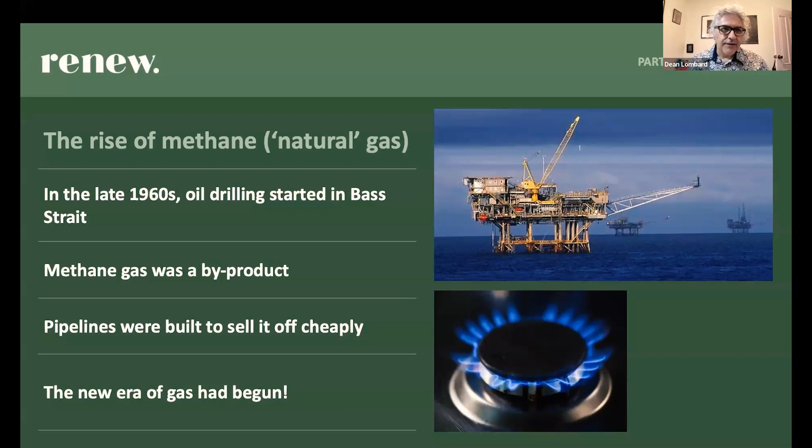So that's how we landed in the world a lot of us live in now, where we just expect to have gas on tap as well as electricity. Really from the 1970s until about 10, 15 years ago, gas was very cheap, because again, it was just this byproduct.

This led to what became pretty much the norm in urban areas in Victoria, which is dual fuel households, where you use gas for heating and cooking and increasingly hot water, and electricity for other things. In particular, whole house ducted heating really developed during the 70s and 80s to become pretty standard, heating the whole house.

It does burn a lot of gas, but again, gas was cheap. You were warm, you weren't paying that much. It was pretty cool - pardon the reverse pun.

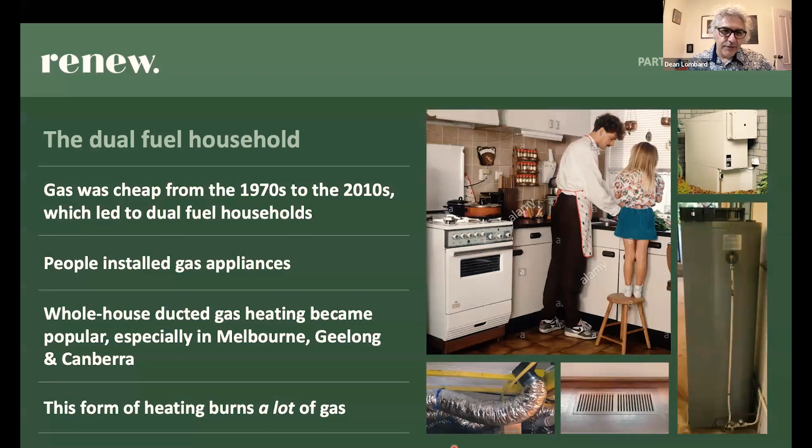There were lots of government programs to encourage people to switch to gas appliances. It was seen as the future. They were much cheaper to run than the equivalent electric appliances, and they worked better, because the electrical appliances didn't work that well - you remember the old-fashioned electric cooktops were pretty useless for cooking on, for example.

Things are changing now because those oil wells are drying up, and gas is now much more expensive because it's much harder to get those last bits out, and a lot more gas comes from coal seams or fracking. It's much more expensive and makes much more pollution. We also export a lot of gas now internationally, and that's put prices up. So gas is no longer cheap, and it's no longer clean.

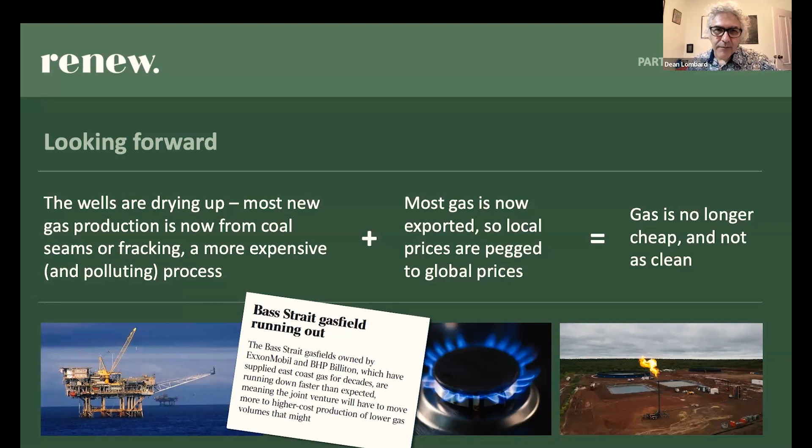One of the other changes is that the technology of electric appliances has also improved a lot, and modern electrical appliances for heating, cooking and hot water are much more efficient and work much better than the old ones that some of us remember from houses we used to live in. I've said a few times hot water, heating and cooking.

That's because they're the three things that most households use gas for. You don't normally use gas for other things, though there are gas lights and gas tumble dryers, but generally hot water, heating and cooking is what we're used to using gas for, and they can all also be done with electricity.

Is it more than two-thirds? 45, 55, 65 - yeah, more than two-thirds of energy the typical home uses just on heating and hot water. That's huge. So shifting that from gas to electricity makes a big difference.

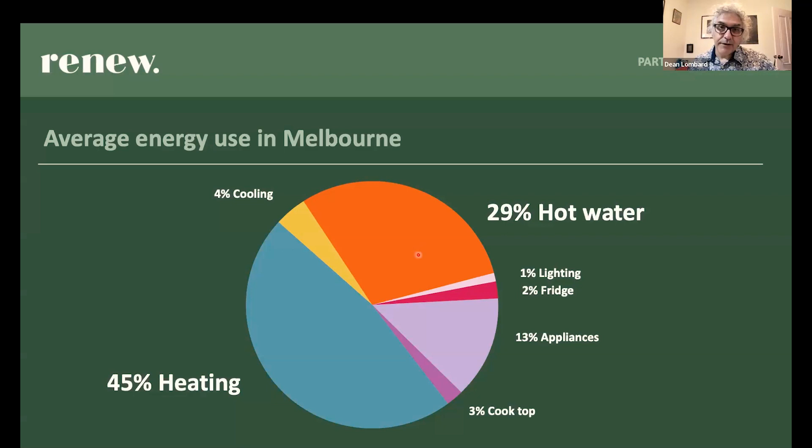Especially if it's cheaper - is it cheaper? Good question, because a lot of us who grew up in Melbourne have this belief that gas is cheaper and electricity is more expensive, and I'm going to try and pop a pin in that balloon right now. It did used to be the case that it was cheaper to heat water in your house with gas than electricity, and it's no longer the case.

We found that, yes, sometimes these efficient electric appliances cost a bit more upfront. It's actually not as much the case now as it was when we did that report in 2018, because prices have come down a lot. But they do lead to lower energy bills, so even if they're a bit more upfront to buy, you actually save over the life of the appliance through much lower energy costs.

It's worth remembering that one benefit of not having a gas connection and being all electric is that you don't pay that daily or monthly service fee for the gas bill. Your electricity and gas bill both have that daily fixed charge, often between 70 cents and a dollar a day, listed separately, and you pay it no matter how much you use. If you don't have a gas bill, you're saving about 300 dollars a year just by not having that fixed cost, not even counting your energy usage. So that's one thing that helps make a single fuel a lot cheaper for a household than having dual fuel.

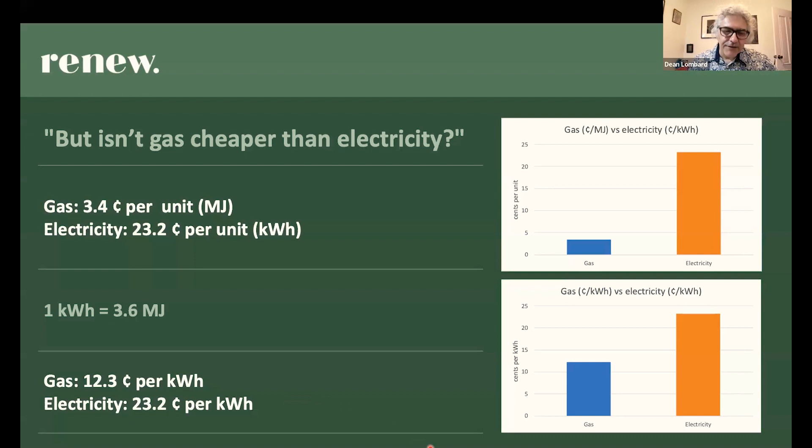So you need to actually convert them to the same units to compare the price. It's the same as measuring one thing in kilograms and another in pounds, the numbers will be different, but that doesn't mean they reflect the true difference, because the units are different. If we convert gas to kilowatt hours too, so we measure them both the same way, gas is still about half the cost of electricity per kilowatt hour. The same energy value of gas costs half as much as that same energy value of electricity, which again would quite reasonably make you think gas is still cheaper.

But here's the kicker: we don't get gas or electricity for their own sake, we get them for what they can do for us.

We get electricity so it can run a heater or run a light. We get gas so it can run a heater or cook our food. So we really need to look at how efficient the appliances are at using the energy, because what's important to us is not energy in, but energy out. We want the same amount of energy out.

That's when I mentioned before about the improved technology of these electric appliances. Modern electric appliances use heat pump technology - reverse cycle air conditioners for heating, and heat pump hot water systems for hot water. They are far more efficient than the gas systems.

Here's two examples. Gas ducted heating is between 50 and 80% efficient. That means for every 100 units of energy that goes in, you get between 50 and 80 out in hot air, and that depends on what condition the ducts are in, et cetera.

Whereas a reverse cycle air conditioner is 450% efficient. You actually get more heat energy out of it than electrical energy that goes into it. And that sounds like it goes against those laws of physics, and I'll explain in a few slides why it doesn't. But for now, just take at face value that the heat pumps actually produce more energy than the electricity that goes into them, because they also pull energy from the ambient air around us.

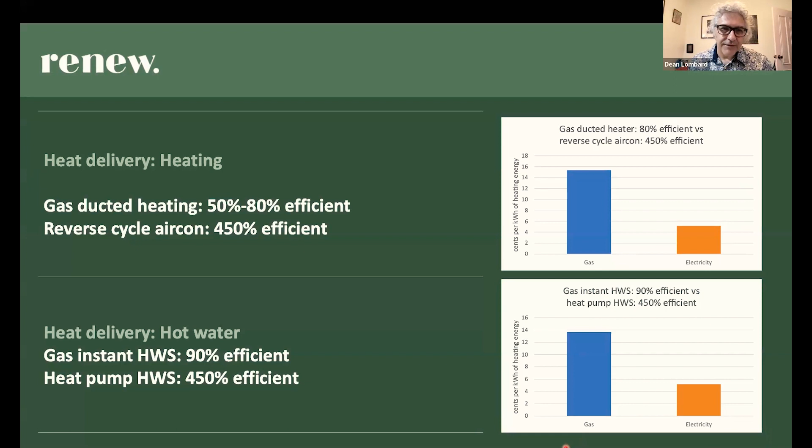This is cents per energy out of the appliance. You get far fewer cents for electricity than gas for the same amount of heating. It's pretty similar for heating as for hot water. This is basically how many cents per unit of energy out. The efficiency of the modern heat pump electric appliances basically means you use so much less electricity, so much less energy to run them, that it's cheaper, even though the electricity is a bit more expensive. I hope that's not too confusing, but...

I'll explain a bit more how the appliances work in a bit more detail in a second. I just want to move on to the emissions picture, because a lot of people are concerned about the emissions, especially because we know that a lot of electricity is made by burning coal or gas. And we were told that gas is quite low emission, and we know that coal is quite high emissions.

One thing is, the electricity grid in Victoria is not just coal. We have a fair bit of gas, which is low emission. What I mean by that is we actually use gas to generate electricity, not just use gas in our homes, but gas is used to make electricity. We have quite a bit of gas electricity generation. We also have a fair bit of solar and wind in Victoria - not just solar on people's rooftops, but also large-scale solar farms.

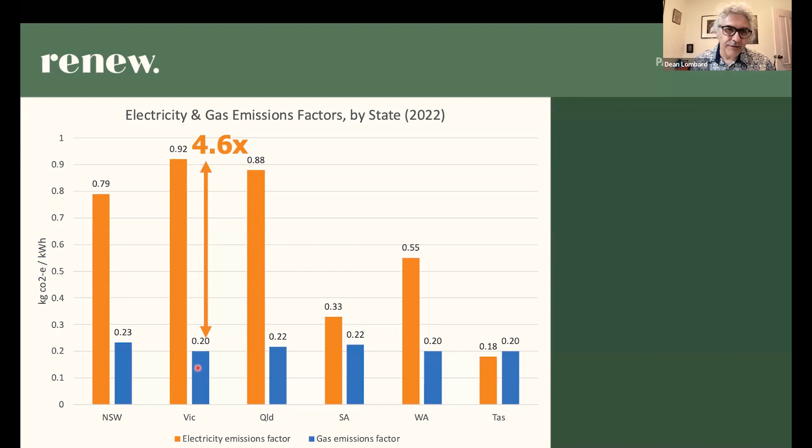...we're going to use a lot more emissions if we're using electricity instead of gas. But again, the same factor comes into it - the efficiency of the appliances. The reverse cycle air conditioner uses 5.6 times less energy than the gas heater it replaces. The heat pump hot water system uses 5 times less energy than the gas instant hot water system it replaces. And so that 5 times actually outweighs the 4.6 times, right? You use 5 times less electricity, so because you're using so much less, you actually are producing less emissions than if you're using the gas one.

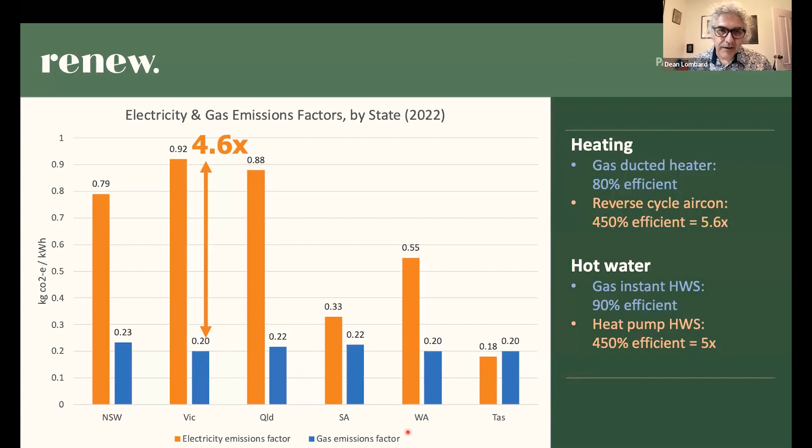This is sort of borne out by this study that we did about 4 years ago, again looking over most of Australia. We modeled the energy usage of whole house appliances - all the appliances that could be either gas or electric - and compared, looked at the emissions, looked at the energy usage of the appliances, looked at the emissions of whatever state they were in, and measured what the emissions are across a year for these houses if they have gas appliances or electric appliances.

We found that in most places in Australia, a house with gas appliances actually generates more emissions than a house with electric appliances. Here's Melbourne - it's a bit less, not heaps less, but definitely less.

Most places in Victoria, it's actually a bit more of a gap than Melbourne. The only places in Australia where the all-electric home has more emissions are places that are very hot and don't really use any heating. Mildura in Victoria, they're about even. Brisbane, it's more emissions to be all-electric because you don't really use your heater. But for most of us in Victoria, right now in 2023, electric home on average has less emissions than a gas home.

Even though our electricity grid has more emissions than our gas grid, that's because the all-electric homes use less energy.

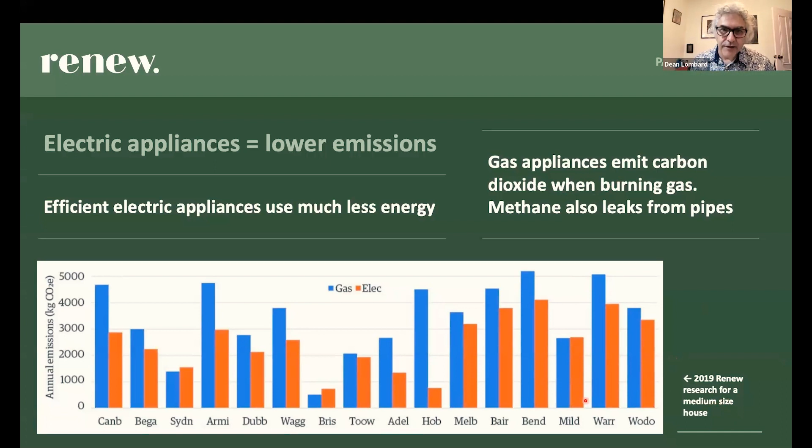But also, that's just now. This research was from 2019, so it's a few years ago, and things are changing. Gas is actually getting dirtier because as those oil wells dry up - and they're the easiest and least emissions-intensive way to get gas - we're getting more and more gas from what they call unconventional gas, extracted from coal seams or fracking. This creates heaps of wastewater, emits much more greenhouse gases, and is piped a lot longer distance. There's also gas leaks in pipes that create emissions.

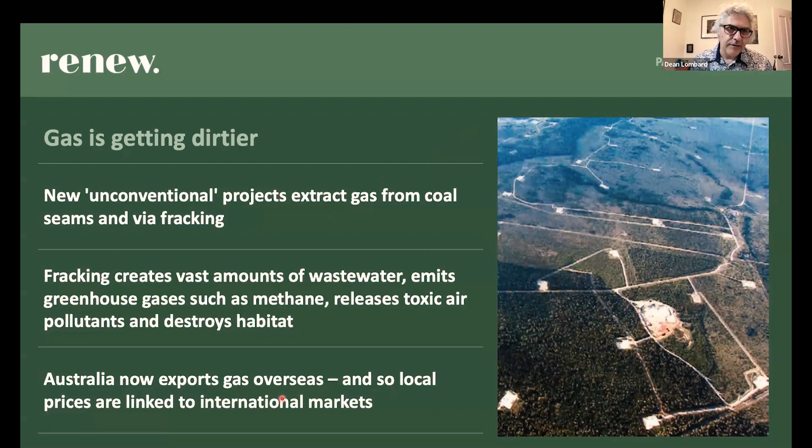Every year gas has a bit more emissions than the year before, and it's also getting more expensive because of its link to international markets. And electricity supply is actually getting cleaner - I mentioned already about solar and wind lowering the emissions of our electricity grid.

Every year there's more of these renewable generators and more solar panels on people's roofs, which are part of the energy system. Our energy supply in Victoria already is around 30% renewable on average over the year, and that's a lot more than it was even a few years ago. It's just going to keep getting more as more of these systems are built. By 2030, our grid is projected to emit about a third as much as it does now - that's a huge change.

So if we go back to this chart, this is 2022 - I did this with 2022 figures, the latest figures from the greenhouse accounts, for each of those states. In 2030, it looks like this, and this will blow your mind - that's how much the emissions of the electricity grid in each state are going down over the next seven years, because of the increasing growth of renewable energy.

So by the time you get to 2030, it doesn't even matter - even if the electric appliances were using the same amount of energy as the gas appliances, which we know they don't, they'd still be low emission because the emissions are going to drop so much. That's all part of this whole national target towards lower and lower emissions.

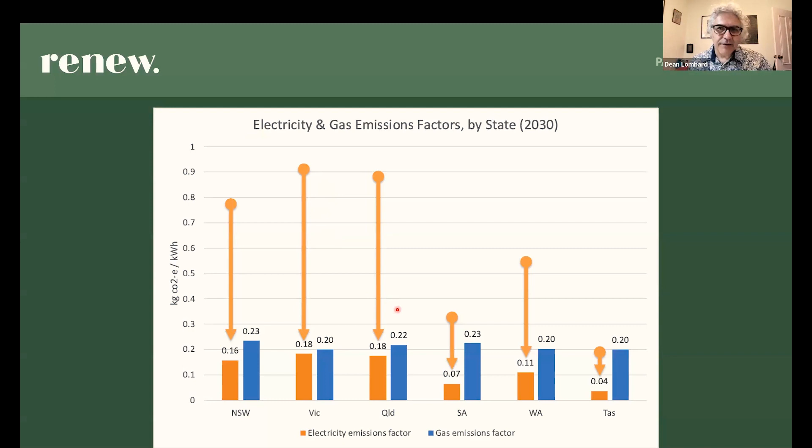That's the quick summary of the cost thing and the emissions thing. I'm now going to talk a bit about the appliances, and this is where I'll dig a bit deeper into that weird thing about reverse cycle heat pumps producing more energy than they take to run. But first, I'm going to do a quick overview of the evolution of appliances.

In the 1960s, these were the modern, cheap, clean appliances. Some of us will have had some of these in houses we grew up in, or share houses, or whatever - we might still have them in our houses now. These old, what they call resistive electric stoves with an element that gets hot - it's the same technology used inside the old electric hot water systems and inside these very groovy looking but not particularly effective heaters. It's called resistive.

I might use that term a bit, so I'll explain. The way a resistive electric element works, it's the same as a light bulb - you just jam a lot of electricity through a thin wire and it gets hot.

That's why, when your phone's charging, it gets hot - same sort of thing. These appliances are designed to make heat by forcing electricity through a lot of resistance. That's why they're called resistive. Very effective for making heat, but varying utility.

We all know with these old resistive stoves that they take 5 minutes to heat up and then they don't turn down immediately, so you got to take the pot off, and it's a bit of a pain. These heaters are great for making your legs feel warm, but they don't really get you when you step back a couple of meters. So these are the mod cons in the 60s. We now just remember them as being a bit useless, really.

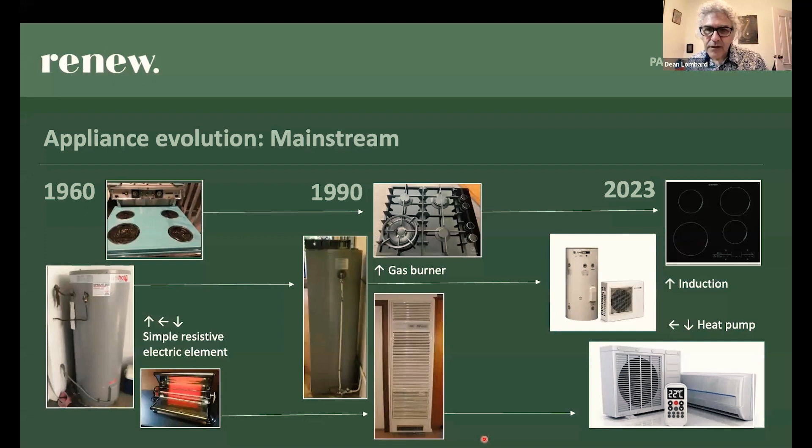So it's really this change of technology that makes the difference for all this stuff. How the heat pump works: basically, the electricity that runs it spins a fan and operates a compressor, which is inside that box. The fan sucks air in from outside the house, forces it through the compressor, and in the compressor it basically extracts the heat from the air. Cold air gets blown out of that box, but the heat that's sucked out of the air is sent to the air conditioning unit, and then there's a fan in the air conditioning unit that blows it out into your room, makes it warm.

And this is why you can put in 1 kilowatt hour of electricity into the heat pump, and get 5 kilowatt hours of heat out. A kilowatt hour is like an amount of energy. Typically it's 1 kilowatt to run the heat pump, and it puts out 5 kilowatts of heat. You do that for an hour, you've produced 5 kilowatt hours of heat.

The thing is that even when it's winter, that cold air still contains heat. That's a little bit hard to get your head around sometimes, but just think about it as: when it's 2 degrees outside, it's really cold, right? But when it's -2 outside, it's a lot colder, right? That means there's still heat in the air, because 2 has more heat in it than -2. Although we feel it as cold, there's actually heat in air down to basically -273. -273 degrees Celsius is when there's no heat in the air. And as soon as you're warmer than -273, then there's some heat in the air.

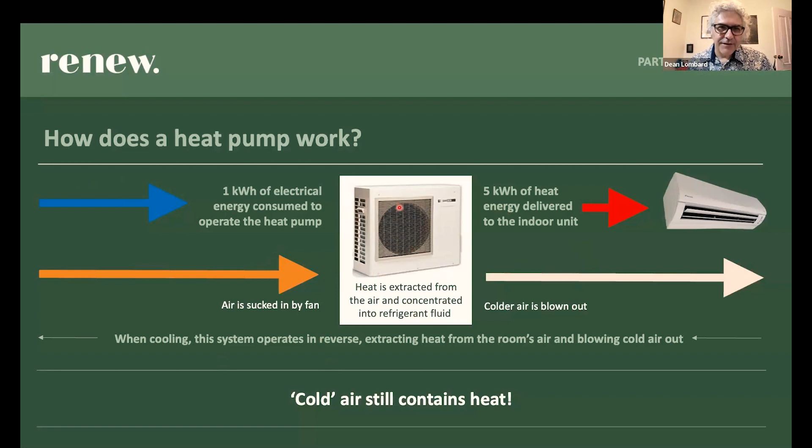Reverse cycle systems heat and cool. The way air conditioners and fridges work is exactly the reverse of this - they take the cold air in and uncompress it, which produces heat that they take out. I'm not a technologist, but it's basically a fridge in reverse, an air conditioner in reverse. That's why it's called reverse cycle.

So that's basically how it works. Now, thinking about the appliances, because people often ask, okay, if they're going all electric, what are the appliances, what are the differences? So I'll start with hot water.

The efficient hot water systems use a heat pump, just like a reverse cycle air conditioner. There are two types generally. Some have the compressor built into the tank, so it's a single unit. Others have a separate one mounted on the ground next to it, just like the box you see for an air conditioner. They're a storage unit, just like a gas storage unit - there's a particular volume of hot water, they heat it, the tank's insulated, it stays hot for quite a while, and you use it at mains pressure.

You use it when you have a shower, turn on the tap - it's really exactly the same as your gas storage hot water system. Just like gas ones, the modern ones are more efficient than the older ones, and they have good fast recovery if you use up all the water. As we learned from our gas hot water systems, you've got to get the right size for your household, otherwise you run out of water. That's the same for these. So if you're shopping for one, do make sure it's the right size for your household.

They normally scale them according to how many people a house has. It's usually a good idea to scale them according to how many bedrooms a house has, even if there's fewer people living there, because if you sell the house and people with more people move in, it's still going to be the right size for them, or if your family expands, etc. So that's generally the guide.

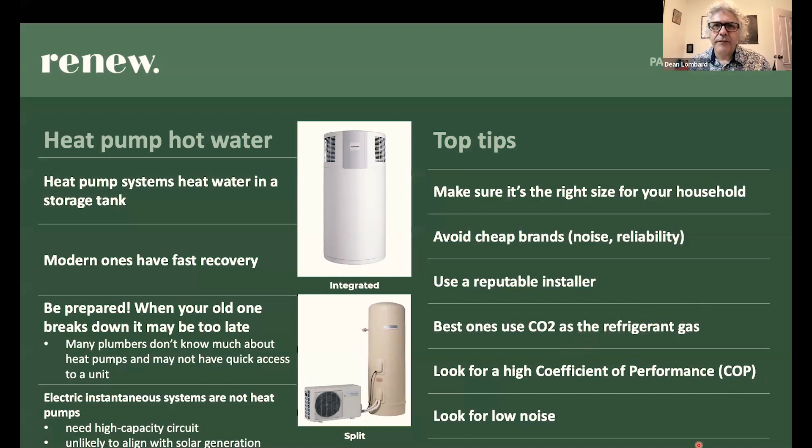I spent a bit of time on heat pumps because they're the sort of new one that most people haven't had much experience with. Reverse cycle air cons - a lot of us are familiar, a lot of us have them in our houses already.

Look, if you're replacing a ducted gas system with reverse cycle air cons, you normally need a few of the reverse cycle units spread through the house. If your house is not well insulated, you might find it hard to keep warm. Ducted gas actually works well to keep a poorly insulated house warm because you've got heat coming into every room, but it's very expensive because you lose a lot of heat through the ceiling. So it's a mixed blessing.

If you get your insulation good and stop as many drafts as you can, you'll find that with a few reverse cycle air conditioners strategically located around the house, the air temperature equalizes within the house because it's insulated and the whole house will be warm. Typically people use a large one in a living area, smaller ones either in bedrooms or maybe in a corridor outside a couple of bedrooms.

Some people are sensitive to the draft because they blow the air with a fan, so you can actually set the fan speed quite low. You can also set the louvers to make the air come out sort of high. It still circulates down through the house.

Air cons have the star rating system, that appliance efficiency sticker. Look for the highest ones. Generally, a high star rating will be cheaper to run. Basically, the star rating normally says how much electricity they use in a typical house in a year.

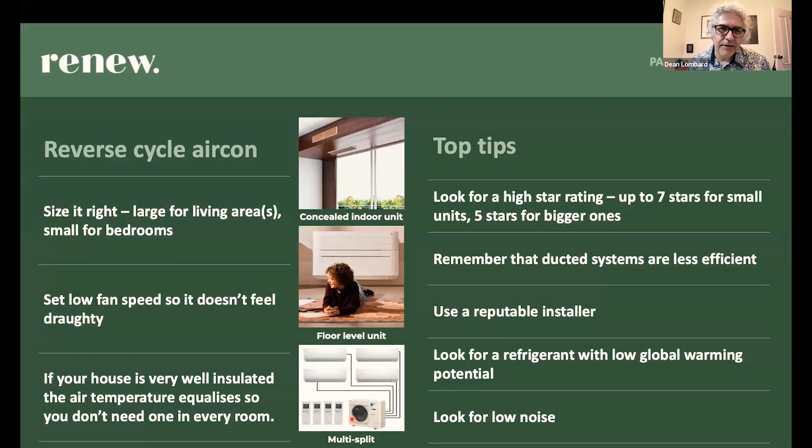Sometimes a couple of multi-splits with two units works well because, again, you limit the outdoor space for the units, but you've got the indoor units where you need them.

I mentioned a bit already about induction - there's a picture with the chocolate, right? They are very different to the old-fashioned electric ones. You've got immediate control over the temperature, it just heats the pot. Some cookware doesn't work with it - aluminium is the most common that doesn't work, and I think copper also doesn't work with it. Some of the cheapest stainless steel ones have so little iron in the steel that they don't work.

The easiest way to tell is to stick a fridge magnet on your pot. If the magnet sticks, the induction will work. That means there's enough iron content in the metal to work.

Check reviews, like buying anything - there's a lot of brands out there, it's still a fairly new area. A lot of the mid-price ones are very good. Check reviews, ask people that have got them. They have different ways of controlling them. Try them out in the store if you can and see which one works for you.

Another big benefit of induction is there's no indoor air pollution, because there is air pollution inside the house from burning gas. It's something we've become aware of more recently. There's been some scientific studies in the last few years suggesting there may be a link between childhood asthma and a lot of gas cooking inside the house. So that's something to keep in mind, especially if you've got some respiratory issues - that's probably a more important issue.

You can deal with some of that issue by having a really good fan, sort of an over-stovetop fan type unit. The other thing with induction is you'll usually need a dedicated circuit on your switchboard with higher power, because although they don't use that much electricity overall, they do draw high amounts for short periods of time, so you might need to upgrade your switchboard for that.

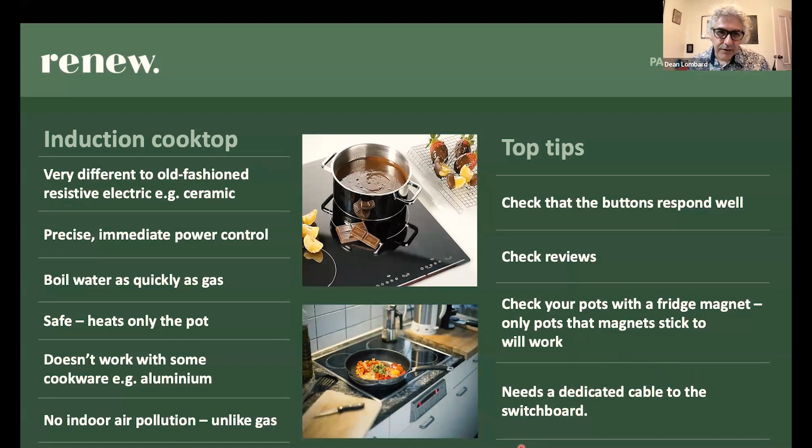You may already have a dedicated circuit if you've got an electric oven. Electric ovens often have a dedicated circuit already. My place does - I've got a gas cooktop and an electric oven, and it's got a dedicated circuit as well. So you might have that, but it's good to find out before you do it so you know what you're in for. Some houses might need more of a switchboard upgrade than others.

How to go about it? Well, you can get some financial assistance from a few Victorian government programs. The Victorian Energy Upgrades program can give you rebates for replacing inefficient heating with more efficient ones, depending on what you're replacing and what you're replacing it with. I believe the government is developing a new rebate program specifically for upgrading heaters to reverse cycle, but I think it's not ready yet - I may be slightly out of date. Google the Victorian government energy website for a lot of information, or look up Victorian government heating rebates or subsidies.

Always find out if there's a rebate that can help, because it doesn't hurt - it's always nice to save money. There's also a rebate for solar or heat pump hot water systems through the Solar Victoria program, up to $1,000 off. Check that out on Solar Victoria's website - there's a link down there to see that.

But these rebates help with the changeover cost - the modeling we did at Renew didn't factor in these rebates. We just worked out that if you're paying the upfront full cost, there's still a clear benefit because of the lower energy usage.

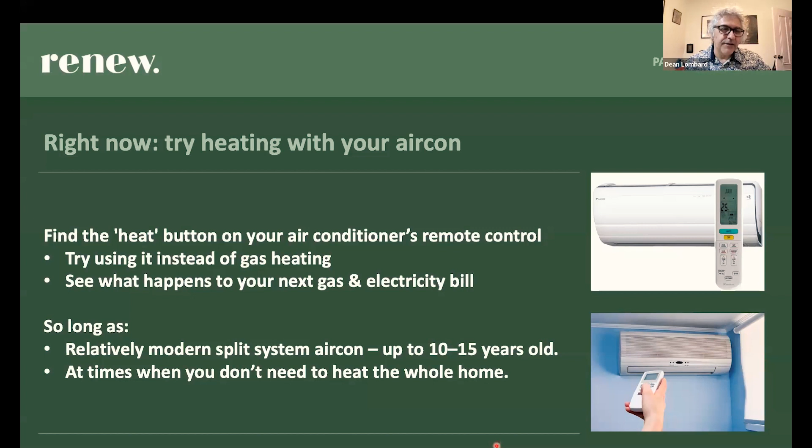If you're building a new home or doing a major reno, our modeling showed that the biggest benefit came from building a house from new. Meet the current efficiency standards, lots of insulation, which is already lower energy usage, and it's far more cost effective to have no gas, to have all electric appliances. The benefits were huge. They're all in the report, it's on our website.

And that good thermal performance really helps. For a new home, the new building standard coming in is 7 stars, but we certainly found the sweet spot is sort of 7 or 8 stars. The cost of a bit more thermal efficiency is outweighed by the energy savings, and until you're going absolutely super incredible thermal efficiency like 9 or 10 stars, it ends up being a lot more expensive to do the last bit.

It's pretty easy to get 7 stars very cost effectively in a new home. It's well insulated, there's no drafts. Your heating and cooling doesn't need much energy because the temperature in the house is quite stable even without heating and cooling, because it just retains the heat and keeps the heat or cold out.

In old homes, it's pretty hard to get as high as 7 stars, but you can still get quite a few benefits from insulating and draft proofing. The house I live in is like a 1940s house, had a reno in the 1970s. It's not particularly well sealed, it's got almost but not complete ceiling insulation. I've done a bit of draft proofing to it, and it still performs pretty well, mainly because it's got the good ceiling insulation. So that's worth keeping in mind.

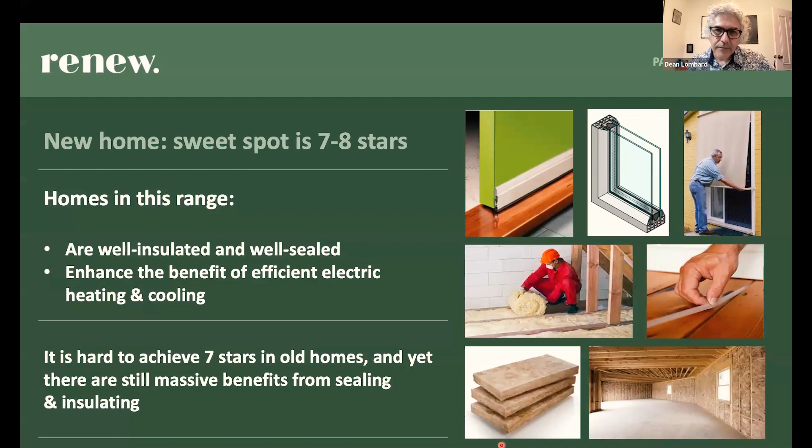Getting near the end, so timing is looking okay. I want to touch on solar panels. Some people think it's not worth going electric unless you've got solar. It's not really true, certainly it's better with solar, but it's almost the other way around. If you've got solar, it's a real no-brainer to go all electric because you can't replace your gas usage with the free energy you generate with your solar panels, but you can replace your electricity usage with it. So solar really enhances the benefits of getting off gas.

If you're going to be in the house for the next 5 years or expect to be, and you've got good sun on your roof, then it's very economically good to get solar. The payback time is pretty short in those conditions. If you can move more appliances to run during the solar generation period, you get the biggest benefit. You can do that with storage hot water, modern dishwashers, washing machines that have timers. You can set them ready to go, and they run during the day when the solar's shining, using your free electricity.

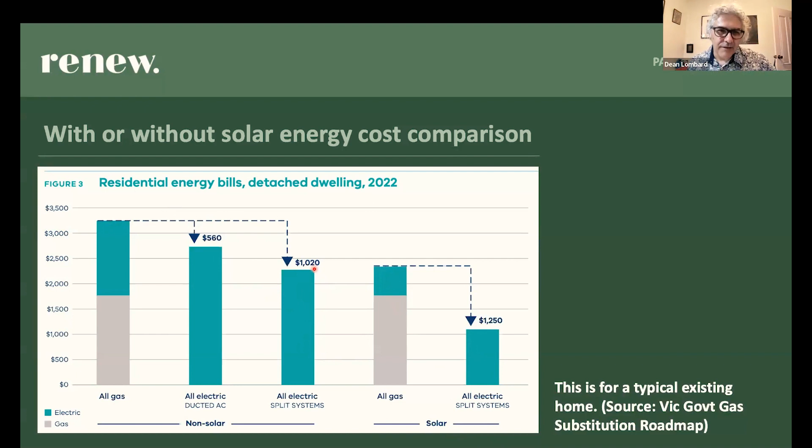The numbers are different to the numbers before because every modeling done in this uses different assumptions, and I haven't tried to make them all the same. A really specific number is inaccurate because it's different for everybody.

If you're going off gas, a few things. You need to close the account so that you don't have to pay that daily charge - you have to close the account with your gas retailer, like Origin or AGL or PowerShop or whoever. You might also have to speak to your gas network provider, which you might not know who that is. In the western suburbs, it's mostly AusNet.

But the service difficulties and faults number on your gas bill says who your gas network provider is. They're the ones who do the connection, and they're the ones who own the pipes that send the gas to your home. There might be a fee for closing your account.

And you might need to push a bit to close off an account because they don't like you to close your account, but push. Some people have done it by trying to switch retailers, then cancelling a new contract. I think if you just talk to your retailer and insist that you want to close the account, talk to your gas network provider if you need to, and insist that you want to close it, you'll eventually get through. If they're unhelpful, call the Energy Ombudsman and they'll help you.

You don't have to get the gas meter removed and the pipes removed - that's called abolishment. But there's a fee to have it removed, so you can just close your account and leave everything there.

In the end, it's probably safer to have the connection removed. A lot of people like to remove it so they don't have the gas meter there, and they can do stuff with their landscaping. It can be quite expensive - abolishment. Like closing the account really only costs $30 or $40 usually, but abolishment could cost between $500 and $1,000 because they have to come and disconnect it from the mains and deal with the pipe.

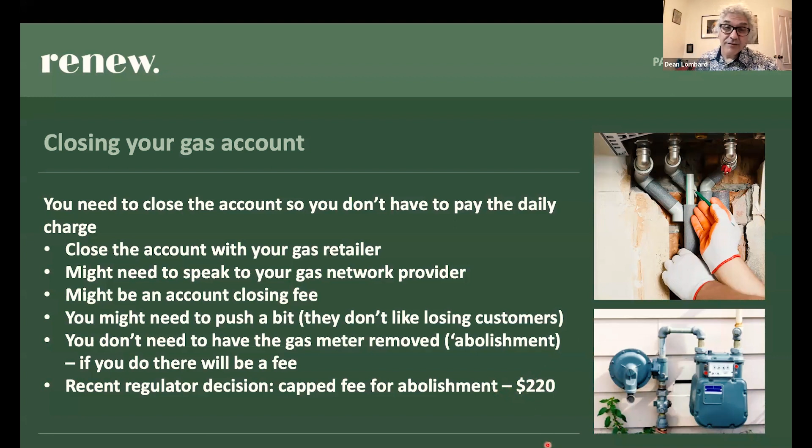So it's a good time to go get the gas cut, pipe removed, take me completely off the network. They will try to talk you out of it - they'll say, oh, if you sell, it'll be worth more if you're on gas. I don't know if that's necessarily true. It certainly used to be true, but I don't know if it's true anymore because there's such a movement towards getting off gas at the moment.

All electric - the fuel we use in our home is not just our cooking and our heating and lights and stuff. We use a lot of fuel in our car. So if you really want to go all electric, think about a transition plan to go to an e-car or e-bike as well.

The Victorian government's subsidy for electric vehicles recently ended, but there's still a registration discount. There's also a road user charge, though you save a lot of money from petrol, which contains a quite high road user charge in itself. So swings and roundabouts a bit, but it's generally cheaper to run an EV than a petrol vehicle, so long as you can charge it from your home at least some of the time. That would depend on whether you have off-road parking, basically. There's a whole other topic on electric cars, which we can't go into now.

A few other things to consider, really a few alternatives. I was going to skim through these really quickly because it's time for our Q&A.

Resistive electric hot water, the old-fashioned type, can work well if you've got heaps of solar, way more than you need, because you can just use it in the middle of the day to heat your resistive hot water tank instead of just exporting to the grid. So that's the thing that some people do. It can be more cost effective, but really only if you've got crap loads of solar generating electricity that you don't need. Then it doesn't matter that those heaters are quite inefficient because you're not using the electricity anyway, and it's just going to waste.

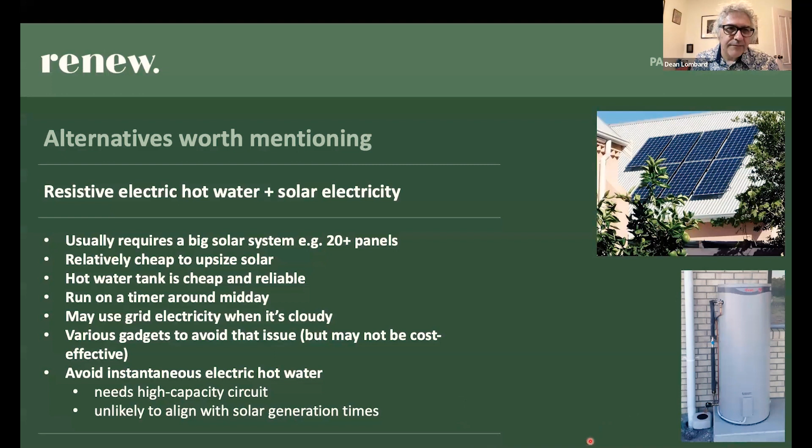Solar thermal hot water is the type you've seen on your roof. The sun heats the water directly - it's different to solar panels. It's usually boosted with gas or an electric element. These are actually quite expensive, probably more expensive than a lot of heat pumps. And the market is sort of shrinking because it ends up being more cost effective to just have a whole lot of solar panels and use some of them to run an electric hot water system. But these are an option - they actually make more sense in much hotter climates than ours. In Victoria, you need to boost them a fair bit, especially during the colder months, and you probably end up using as much electricity as a heat pump in the boosting. So they're not necessarily an energy saver in Victoria, but it depends a bit, and they are an option.

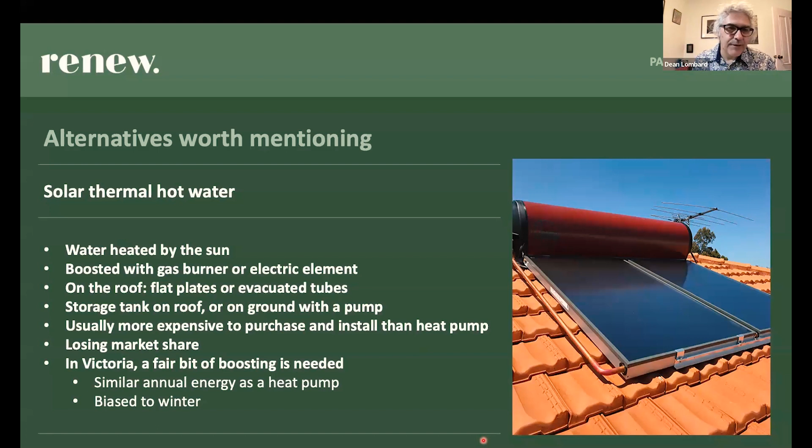Just put it out there - you need to do some detailed modeling to figure out the relative benefit of solar thermal and a heat pump in your specific situation. But generally, as far as I can tell, a heat pump is not really going to cost you any more to run than a solar hot water system, and you save more space on your roof for solar panels or other stuff. So that's my view.

Evaporative cooling is fairly common in Victoria. This is actually relatively cheap to run, cheaper than a reverse cycle air conditioner, but it uses a heap of water, 10 to 20 litres per hour. They're ducted, and it can cost a lot more to run if the ducts are in poor condition. You can also lose a lot of heat through the ducts in winter, and of course these can't provide heating. So we generally recommend getting reverse cycle air conditioners - use them for cooling, use them for heating. But some people love evaporative cooling and they've already got them. I think reverse cycle air conditioners make more sense because it's a multi-purpose appliance.

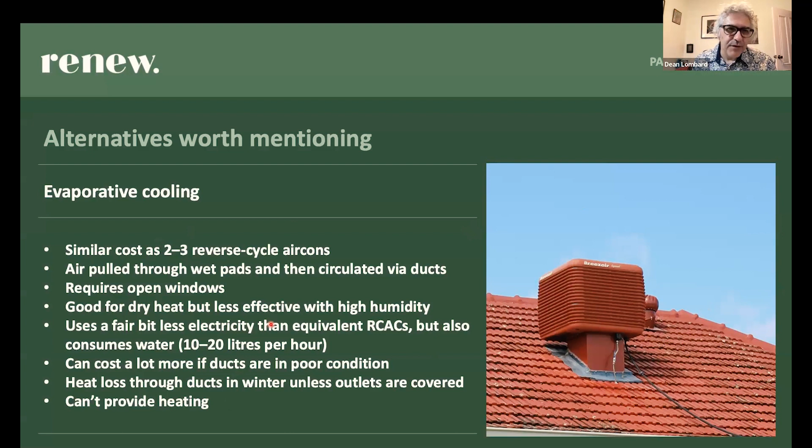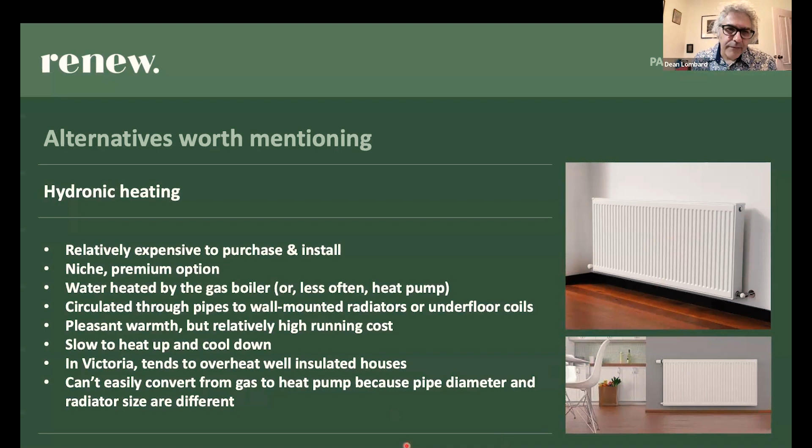Hydronic heating is very expensive to run. It often overheats your house if it's well insulated. And it's very difficult to convert these from gas to heat pump because you need different size pipes and everything. But you can get heat pump versions, and some people love hydronics. So if you can, yes, you can get heat pumps, but they're much more expensive to run.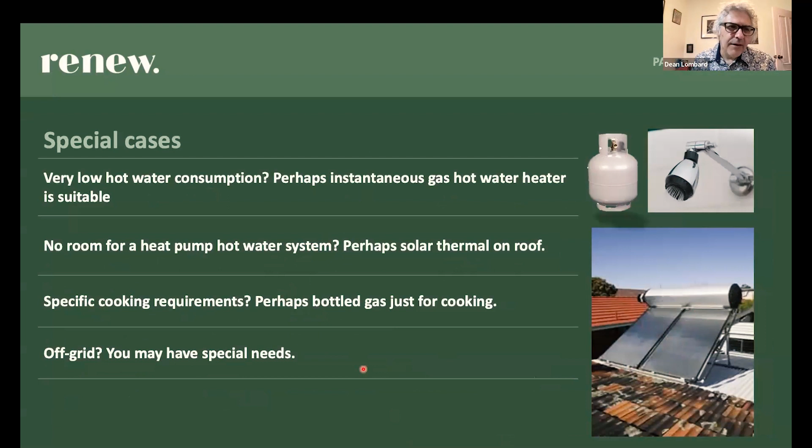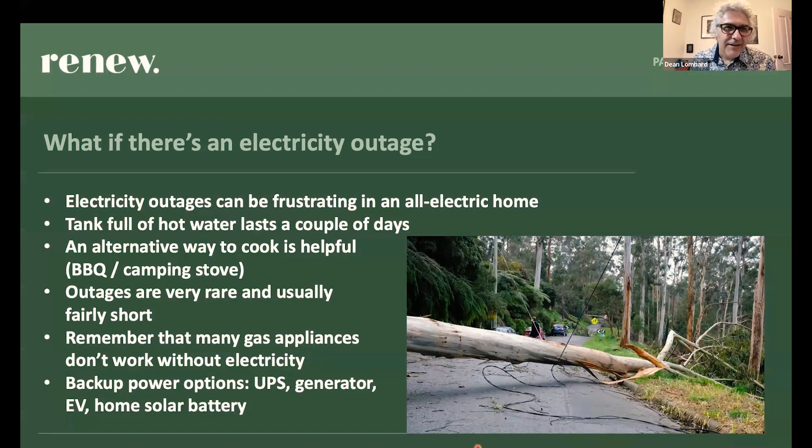A little quick word out to the Getting Off Gas Toolkit that Renew has produced. It's on their website. It covers a lot of stuff that we covered in this presentation, but goes into more detail. It has some case studies, why, how, etc. And it looks at how to plan it, how to choose your appliances. Again, a lot more detail in all this stuff. So that's really worth checking out.